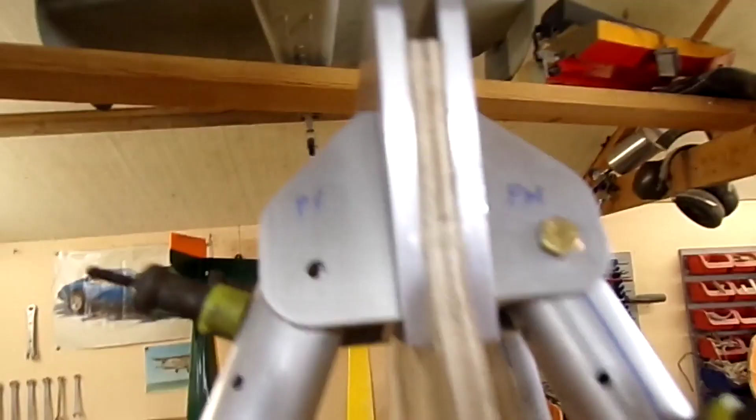I can't get that in far enough because the head of the bolt is touching there. It's going to be interesting how much I need to remove. Go back through the hole. Got to be very careful now because I've reamed it for the bolts, not to damage the holes and elongate the thing, and mark that tube there. No, that's a problem. I can do the other side without, before I ream the thing right the way through.

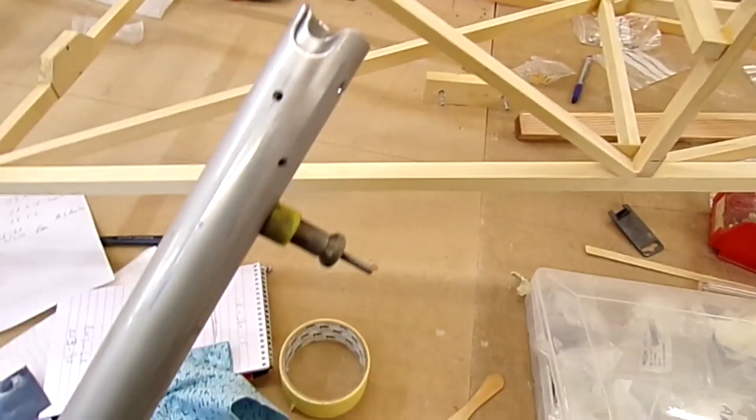So lesson learned. In the end, I did have to cut into the inner tube section, but not by anywhere near as much. So that's a 10mm hole that's then been dressed back out to the edge because it was right on the edge. So there we have it. That now fits. I'll have a little look at the rear strut system after I've finished off the front end.

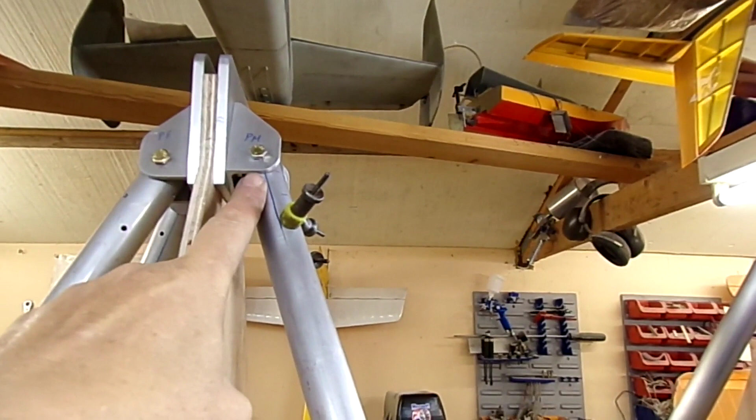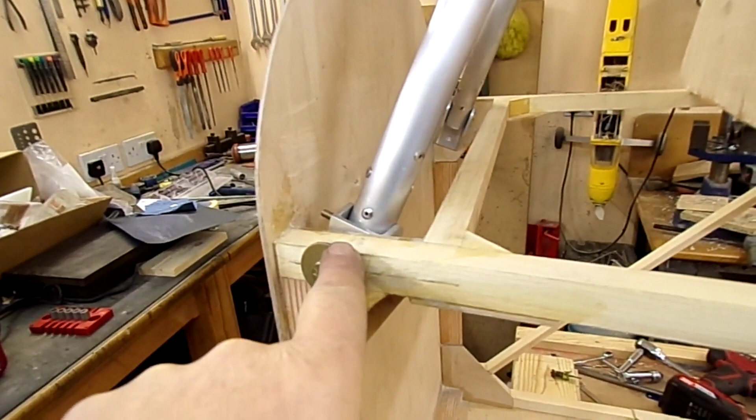Okay, so as suspected, I ended up having to drill a hole in the top rear strut. So we've got a hole in the top rear one, not indicated on the plan. Got a hole rather than a slot in the middle one. Got a slot in the top front one, not indicated on the plan, and in the bottom front one, again not indicated in the plan, but needed. There's no way around it. You just couldn't fit that lot together without having the slots there.

Reduction in strength calculation, well, because we've got sufficient land all the way around in the direction of stress, we've lost nothing significantly at all in any of the positions. So I don't need to put a reinforcing tube in here, which was one of the things I thought I might have to do if the calculations came out, but no. And the two on the front have no reduction at all, well, less than 2%, as I said, loss in strength. And that's being rather generous at high stresses, so I don't see it being an issue at all.

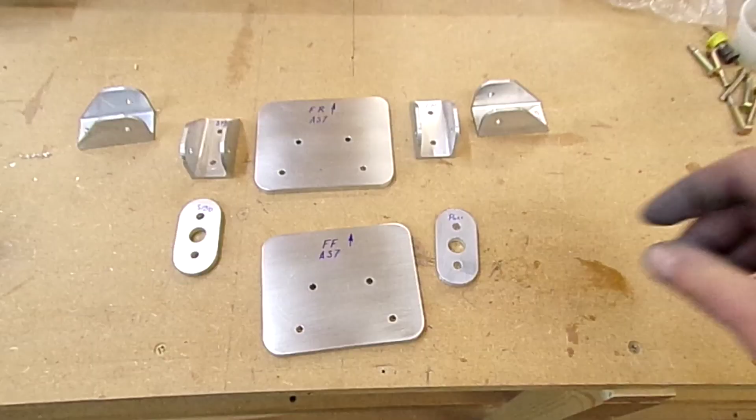Right, I've rounded the corners at the bottom of the front spar mounting plate. I've made up two packers to go in between. There'll be another packer to be made up later on for where the spar is actually attached. The wings are attached to go between the two plates, and there's also going to be sort of tapered spacers once the wings are attached.

That's the plan. So this lot's all made up, it's all been deburred, ready now for me just to bolt together. Some stage in the future they'll get painted, but I'm not planning to do that just yet anyway. So there they are. I'll get this little lot bolted together, and actually I'll show you how good it is before I tighten up the nuts and bolts. Just bring the 4 bolts through. You'll see that there's no shake factor.

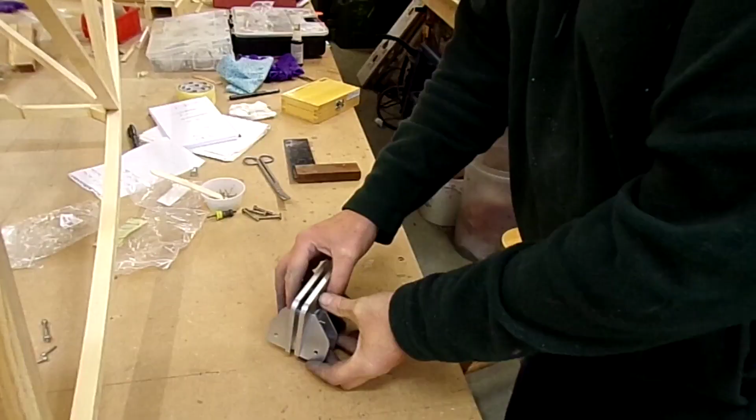Here's the assembly, no nuts on it, and there's no movement. You cannot move that at all. There is no movement there at all. So that's because everything's reamed. I'm just going to put the nuts on. I'll put some washers on, put the nuts on there, and that assembly is then ready to go.

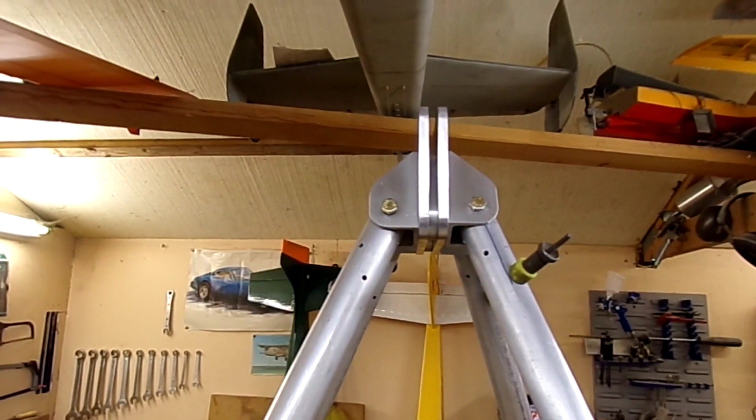So at the moment I've got that little lot set up there with the bolts. It's not tightened down. There's very little movement. I've checked that is absolutely vertical compared to the Longeron datum. So Longeron 0, that there is at 90 degrees, which is good.

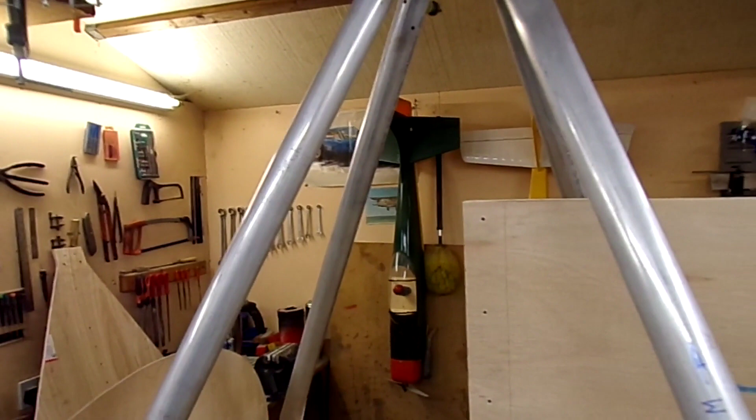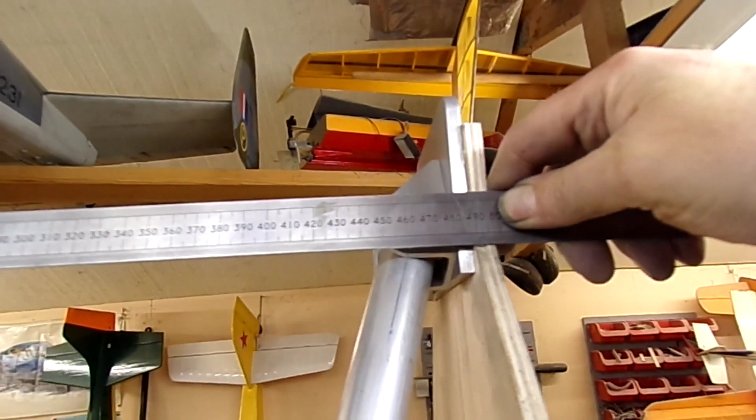I've removed the front part of the jig because it's just too wide, to make sure I get the right distance between there and there. So from the center of this upright here to the center of the gap here is the same as the distance between the centers of my upper wing spars, which is 485 millimeters. So I try and show you that, going the center there to the center there, 485. So that now allows me to start making up the tube that goes between there and there on both sides.

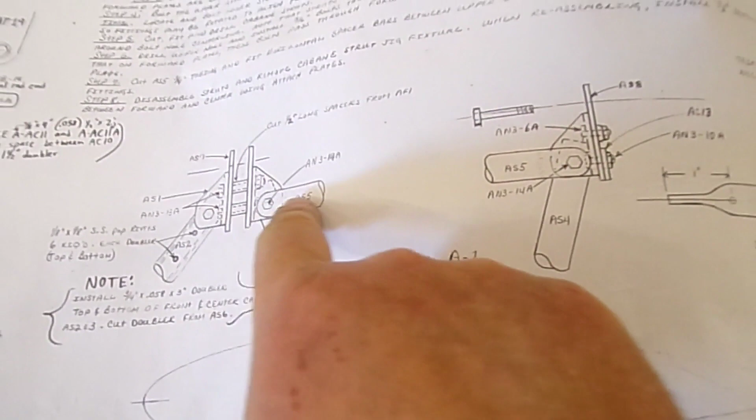Okay, for AS5, which is the brace that goes between the two sets of spar mounts here, we've got to drill a hole 1 inch in from the end, an 1/8 inch hole, and then flatten the tube out in a vise.

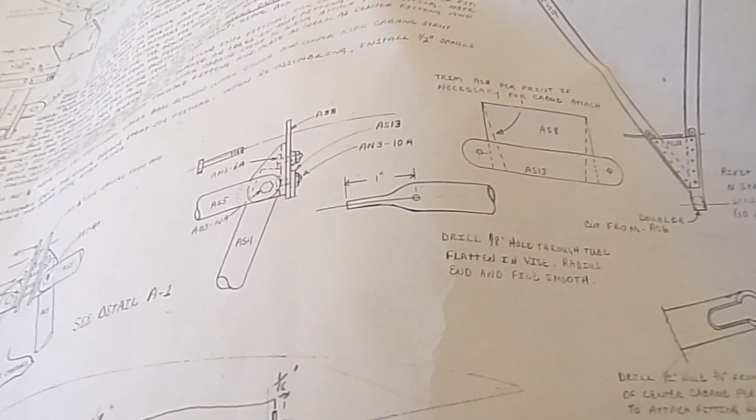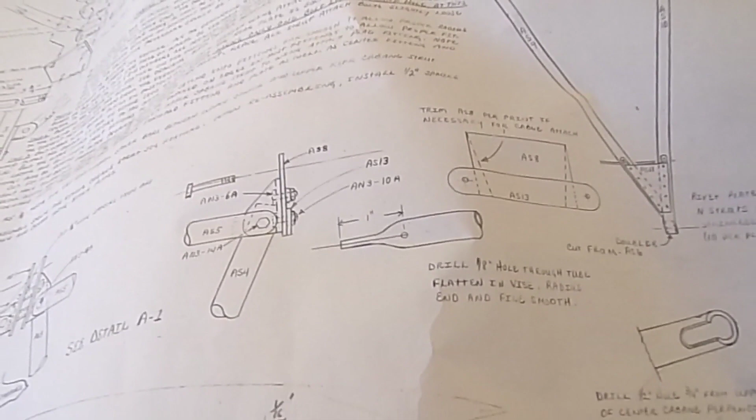Looks quite an interesting sort of fitting. Of course that needs to be actually 1 inch, where the flat section needs to be 1 inch, so have a little experiment. I have done tube flattening before, but we need to make sure we've got enough land out the side, so the bolt needs to go in here 1/2 inch in, and we need to have 1/2 inch because of the edge distance that's set up on the bracket.

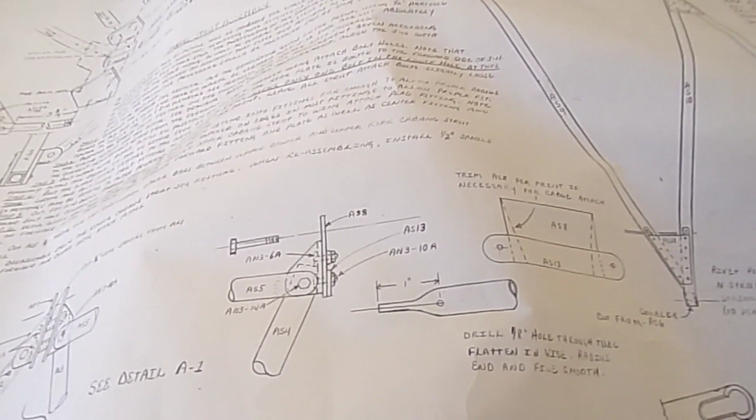So the flat bit here needs to be 1 inch long. I need to just try and work out exactly where that hole should be compared to that, or does it actually need to be at that point there? I can't remember, so I'm going to have a little experiment and see what comes up.

Okay, so my little experiment, as I remembered it, the hole should be just at the end of the flattened section, so that all works. I didn't use a radius piece of wood, which is what I'll use on the final product. I just stuck it in the vise,

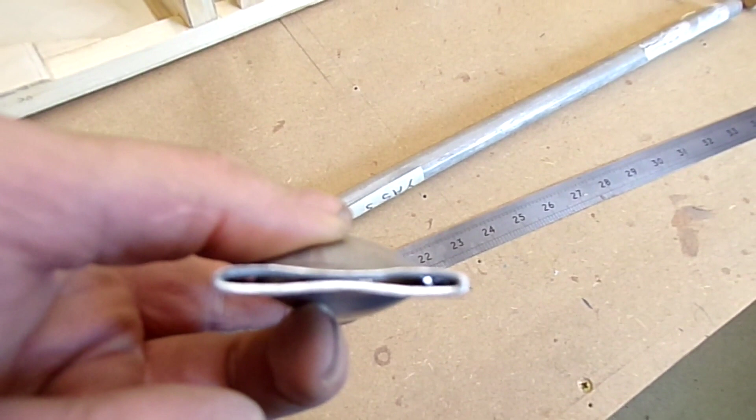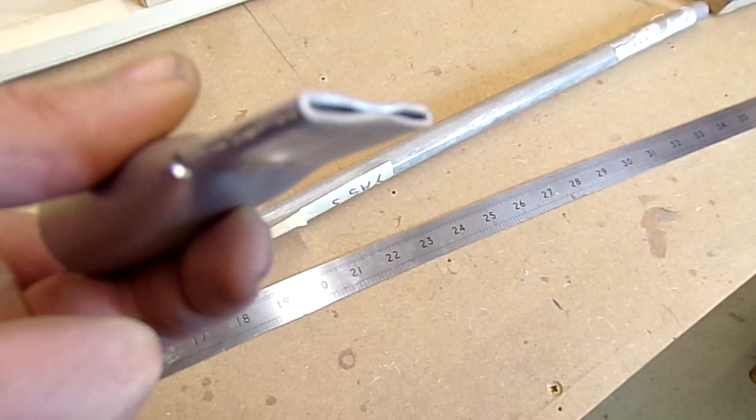but as I suspected, with this thickness of 6061 T6 aluminium, when you flatten it down and it springs back, because it's got quite a chunk of memory, that bend radius to create a nice flat end is too tight and it cracks, which means I'm going to have to anneal it.

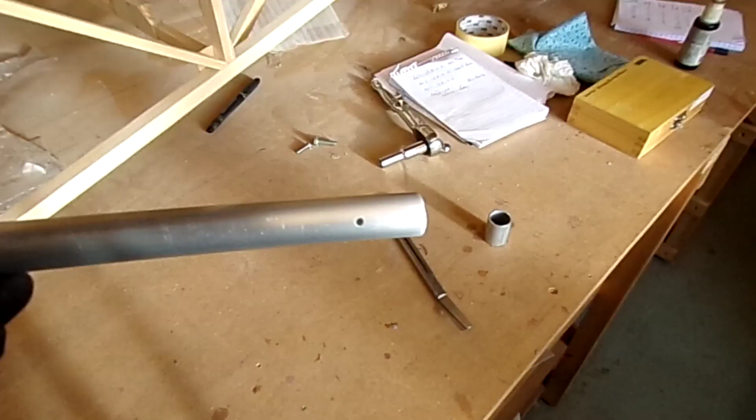So there is my hole, centered 1 inch and 1/16 up from the end, both ends, and these are my pieces of wood I'm going to use to actually create the flattened area. Note radius there, 1/8 of an inch radius, so we should have a nice smooth flattening. We'll see how we get on.

So there it is after annealing it. I use the oil flash method, which you've heard me talk about before and seen me do when I did the little fairing pieces for, I think it was, the upper wing fuel tank area. So there it is. It's been flattened out with a piece of wood. Left some marks from the grain of the wood on there, but not too bad.

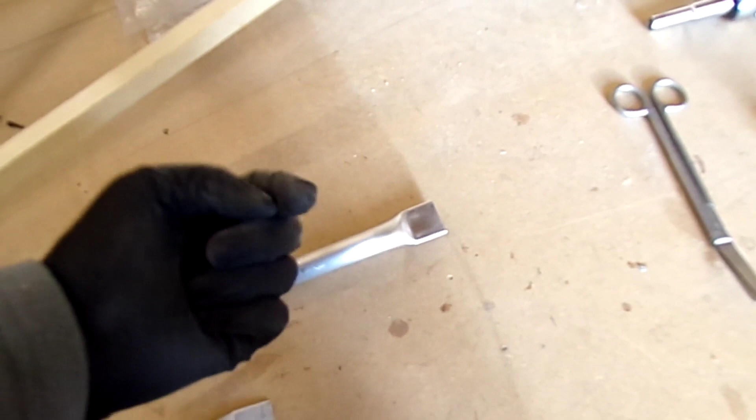Nice and flattened out. So I'm just going to find the centre point, 1/2 inch in, centre punch it, and then radius the ends. Do that both ends. It should be just about right, but I'll do the second end by picking it up using the bracket on the aircraft itself to make sure we've got that exactly the right distance.

Yeah, the issue I've got with the kit supplied item is the distance between here and here is narrower than the base of the plate, so I'd have to cut away the plate. That's shown on the plans that you can do that, but unfortunately it would cause it to lose the edge distance required for the brackets. So you're gaining one area, losing the other.

And it would also be underneath the footprint of the brackets. So these bolt heads, you wouldn't be able to put the bolt heads in. You'd have to put the bolt heads in and then fit the plate, which would mean you'd never be able to take the actual landing wires off without dismantling the Cabane mounts, which would be a real pain.

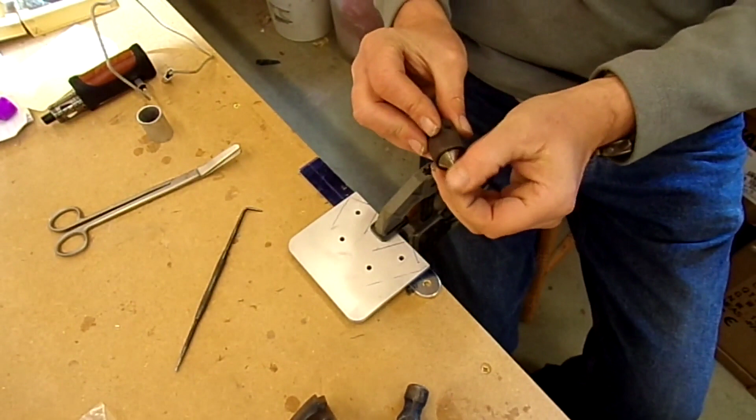So here's a different type of centre punching tool. Here's the actual hardened punch. There's a cone there which centres everything on the hole, and this lot pushes back in so it's absolutely flat and perpendicular to the surface.

And I'm using it to transfer the holes from here down onto the plate below, which is the one for the landing wires. I'm making up my own one because it's coming out slightly different dimensions to the one supplied, going along with everything else that I'm doing that's slightly different.

So it's as simple as that. There's that centre punched in line with those holes there, so I can drill that and then I can actually just put a finished ream through if necessary.

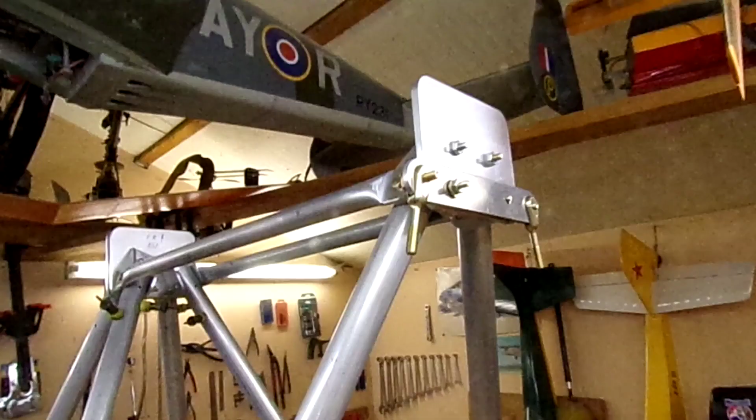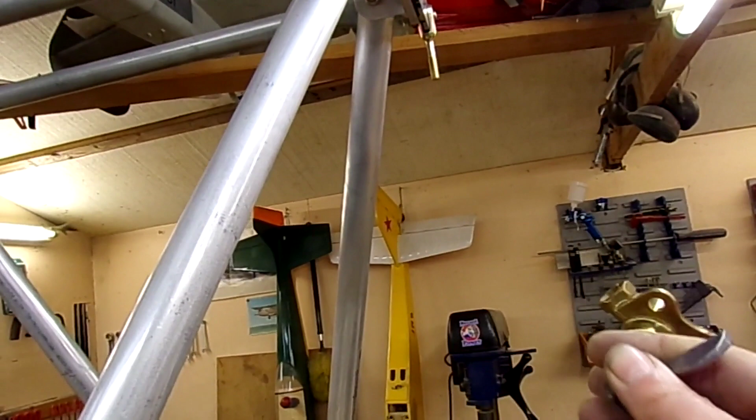Well, there's the landing wire bracket, basically fabricated up in position, but there's going to be yet more mods in that particular area to allow me to put the wing tank selector up in the sort of position, something like that on a bracket. So that's going to go into there. That's the current plan. Fuel line coming out from that will run down.

Thinking about coming down the back of this strut here with a fuel filter visible there, or I might run it along the tube and then down to go into the main tank. We'll work that one out. So next bit, take this lot apart again at the front end here and get these braces riveted.

Okay, now that I've riveted this top end together and got it re-bolted together, the last sort of real bit of construction for this swing set is to drill the holes through these bottom brackets here. So I'm going to use a 1/4 inch brad bit just to produce a centre mark there. I don't think I can get in with the drill to drill it through for the bushing. I'll see if I can, but I'm pretty sure that my guide won't fit.

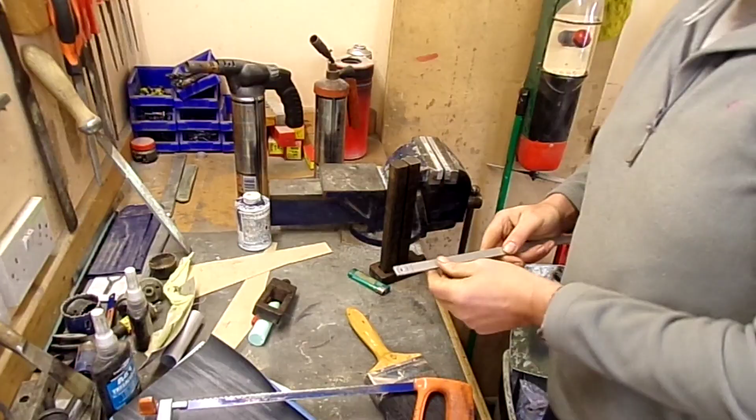So I've drilled the hole at the end and the sort of radius, worked out where I want the bend to start, so I've allowed that sort of radius all the way around. I've added about 1/4 of an inch further on, so that's where I want the bend to start. That's a 1/4 inch further out because I'm using a bend radius of a 1/4 inch.

This is 1/8 of an inch thick, and according to my charts the bend radius should be approximately twice the thickness of the material for T6; 6061 T6 and 6082 T6 should be double the thickness of the material as a bend allowance.

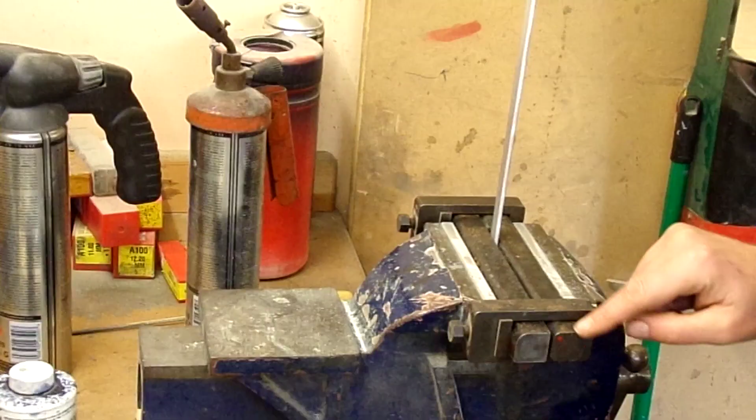So I've got some rather old bending gauge bars here for dealing with the work. One with a little red dot, that's actually a 1/4 inch. So what I do is I'll put this in, and that second line there I want to be level with the top of my bend bars. That's the radius I'm going to bend this towards myself. Just double check the line which I put there, that 1/4 inch line is in line there.

We are at 90 degrees that way, so my bend is going to be in the correct orientation, and I need to bend it back to that sort of angle there, which is going to be sighted. This is a cold bend. And that is pretty much spot on. So this out.

There you go. If you can see that nice curved radius there, centered nicely. So all I've got to do now is I'm going to dress that bit there. I'm going to cut this off a little bit over length, and that way when I've done the bend, the flattening of the tube, the other end of the tube, I've got a little bit of wiggle room here.

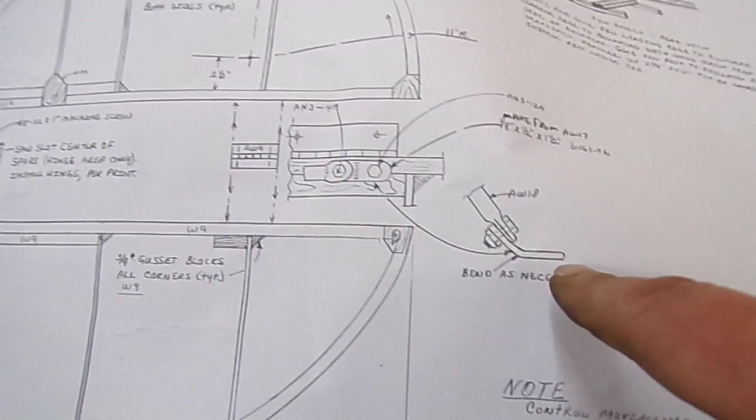So looking at the plans, this is showing the upper struts here going down to the horizontal stabilizer, and it sort of shows it going down to the tab and sitting on top of the tab. So nowhere on the plan does it show the other side where the struts go down, but I'm assuming that it would be just a mirror image.

There's the fit on the aircraft. This is a temporary short bolt because we'd have another tab going off the top. But there we have the tab and the bolt and the nut going through there, going down to here. This bit's on because this allowed me to work out that the forward strut needs to go on the top of this tab, or the two of them can't be on the same side, put it that way. Otherwise we have a slight issue.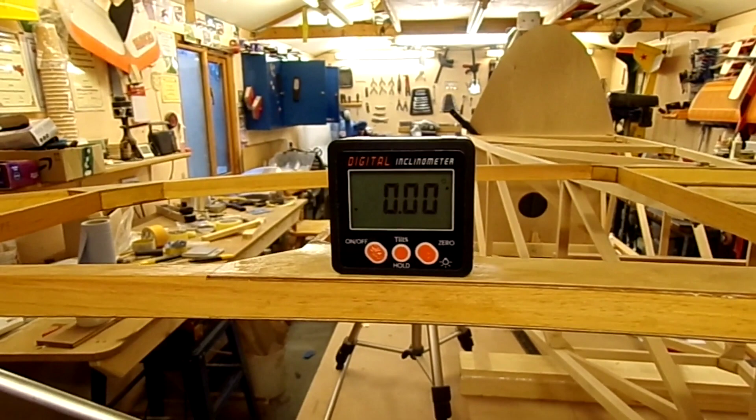So just to show everything's great, there's the tailplane 0, that's been set on the datum, and it's showing 0 there. So this section of the horizontal stabilizer is horizontal.

I suppose I'm going to start working on the forward ones, and with that we have to check and do any corrections in any twists that we might have here. So I've got to get the thing set up with the longeron horizontal, then I can play with that lot, but that's going to be in the next video.

Well, that's it for another video. We've managed to get the cabanes pretty much sorted out, and we made a good start on the tailplane struts. So hey ho, let's see what we get up to next time.